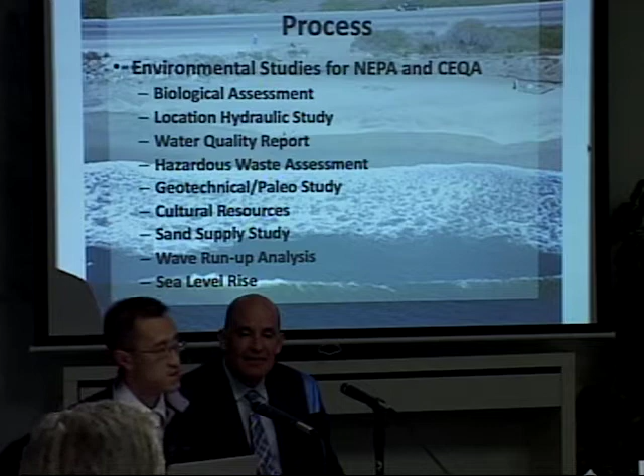With those studies, of course, permitting is also going to have to be considered. The agencies right now that may be at play include the U.S. Army Corps of Engineers 404 permit, U.S. Fish and Wildlife Service, National Marine Fisheries Service, the Regional Water Quality Control Board with the 401 certification. The California Coastal Commission will be overseeing the plans, as will the California Department of Transportation.

We have looked at several alternatives, and we believe we're going to show you the two that will have the best chance of not only protecting the beach, but again, allowing the access, that are, as James mentioned, quote unquote nimble enough so that it will work as an interim solution.

So this is the first conceptual alternative. Maybe a little hard to see. Yeah, so I think it's worth mentioning, because we all had trouble figuring it out too.

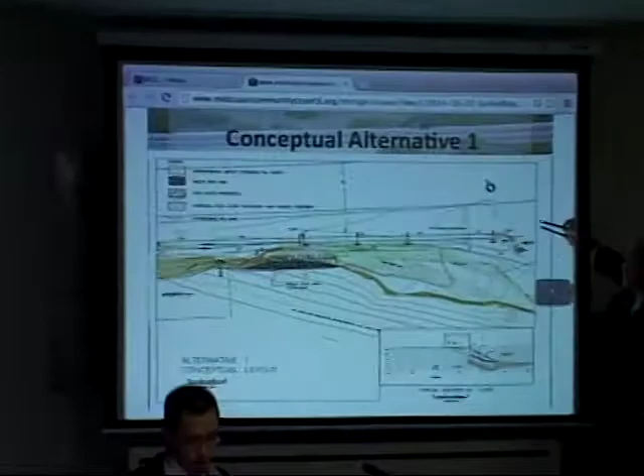If you remember the picture on the previous slides, this is essentially the same view. Can we flip back and forth? Show us where the highway is and where the beach is, to orient us. Coronado Street's here, Highway 1's here, Half Moon Bay's that way, San Francisco's that way, the ocean's here. This is the 13-foot high bluff that comes along. Here's where the severe erosion is occurring.

Currently, the coastal trail stops here, just past Coronado, and then the bike path next to the existing riprap ends right here. So this is the 400 feet of doom - danger - that Alvin can... Okay, so now go back to the previous slide again, so people see it on the picture - basically the same exact view.

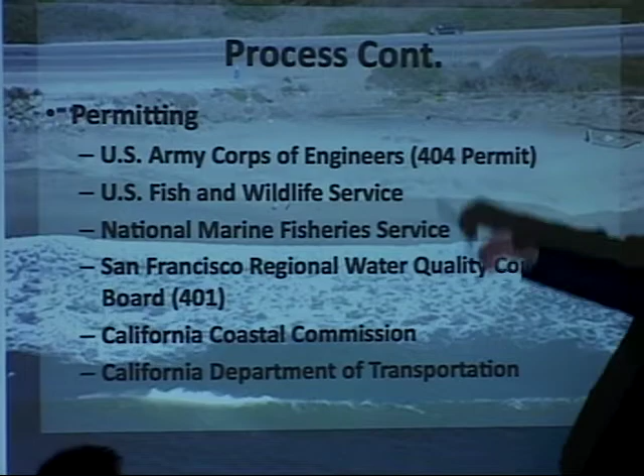Okay, so starting from the northern end,

Like Grant was saying, this is currently the existing coastal trail. We plan on removing a small portion of it in order to conform with our new proposed coastal trail that will run along this danger zone and connect back to the existing coastal trail on the other end. This is about a 400-foot coastal trail, and because it's within Caltrans right-of-way, it will be designed per Caltrans standards. Currently, we have estimated about 20 feet of width.

What's the width of the current trail that's right there where the cursor is? Right now on the northern end, it's a 10-foot trail. The proposed coastal trail will also be 10 feet, but there is also a buffer between the trail and the highway: a 5-foot shoulder on the highway side, and another 5-foot shoulder on the ocean side. So the trail itself is the same as what's currently there?

Okay, yes. I believe on the southern end, the trail is slightly not as wide as the one on the northern end, but... The southern end's wider with the split lane, yeah. Oh right, fancier, sorry. I meant trail, the other way around. Yeah.

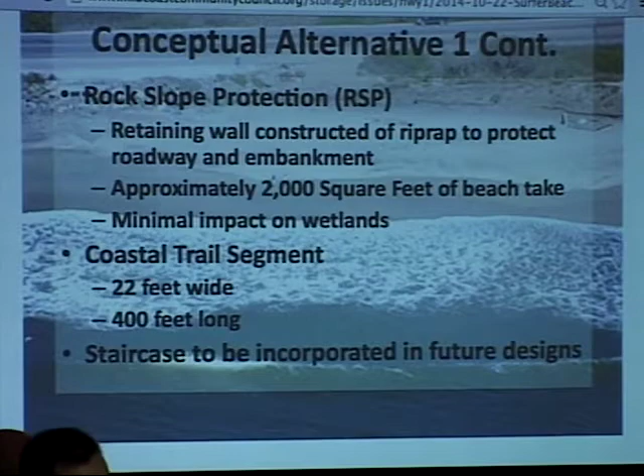With that being said, next I'll talk about the second alternative. The view is the same as before in terms of orientation, this being Highway 1, Half Moon Bay being to the south, southeast, and San Francisco to the northwest.

Again, we're proposing to connect the two ends of the existing coastal trail. On the northern end, again, we'll be providing additional armoring to conform with our proposed embankment. In this alternative, to hold back the embankment of the coastal trail, we're looking at proposing a sheet pile wall that will be vibrated into the beach.

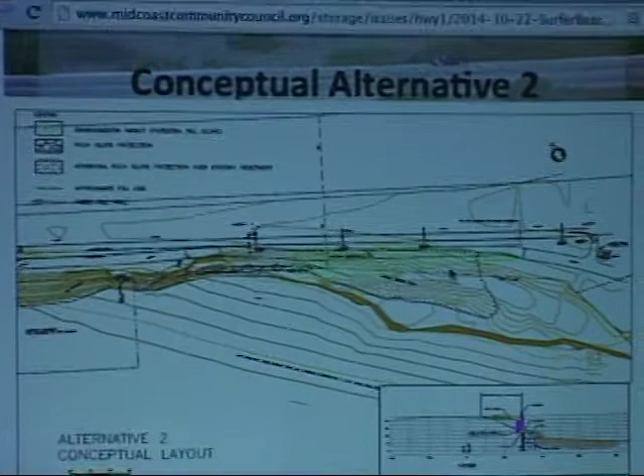As we get closer to the bluffs, it will conform to traditional roadway fill. This green area's edge is pretty much the toe of the fill. Currently in this area there is existing vegetation - I believe it's willows, invasive ice plant, and non-native ivy. There's also a patch of strawberry, the wild strawberry, which is endangered.

Some of this will be removed. The green area will have to be cleared of vegetation in order to put in the fill. But in doing so, what we actually get is clearer sight distance across the coastal trail, and hopefully a better view from Highway 1.

Right now it's a willow thicket, and it's apparent that homeless people have been encamped there. So this would make it a safer trail - people would probably feel safer having an open sight distance. But we would be removing a portion of that willow thicket.

Again, the staircase options are versatile with this one. If we were to come down the middle of the sheet pile, it will probably be a bigger staircase, which may require banisters. And again, temporary access will be provided during construction.

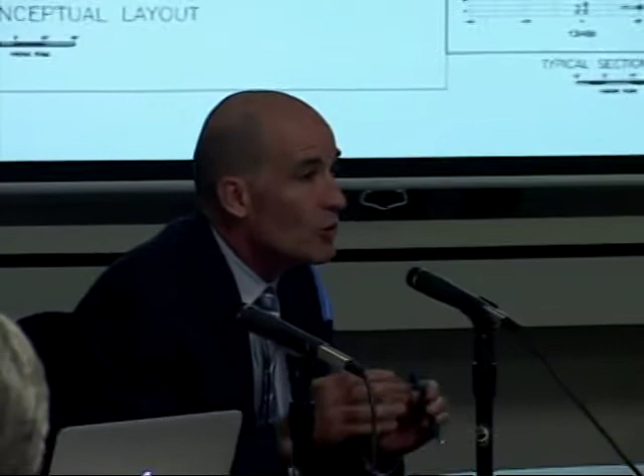Yeah, that's a good question. We have integral consultants doing the sand supply study, and they have access to the Army Corps' model for the dredging study they're doing for Pillar Point Harbor. Plus, they've generated a model for the sediment movement along the coast. So Integral is looking at the sand supply study, incorporating what the Army Corps has already done, and then adding on to that for this study to see how we would additionally affect what they've already looked at. Meaning that when we put the rock or the RSP wall in, the sediment on the coast moves back and forth - typically it's moving down coast, the long shore drift - and then they have this breakwater that's cut it off.

And so without the sand supply, we've caused this excessive erosion without refeeding it. So the Army Corps is looking at either using some of the dredge material from the Pillar Point Harbor to replenish the beach sand, and they haven't quite finished that study, but we've reviewed that and we've looked at that. So we have the Army Corps study.

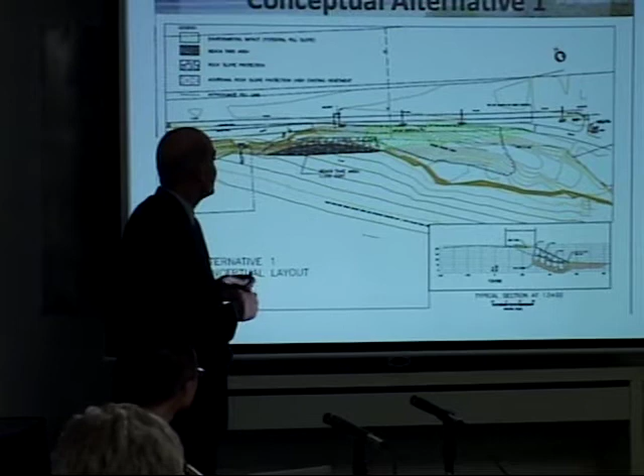We also have some previous cultural resource study that's shown this area doesn't have any existing cultural resources. This site, if you actually go to the beach, you'll see there's a tire in the fill and chunks of asphalt. It's an old Caltrans or old highway department embankment, sitting on top of several layers of terrace deposits - slightly cemented sand deposits that are natural.

So it's not of that great concern that we're not allowing the sediment to continue to feed the beach, because it's not clean sediment. We have looked at those studies and reviewed them, but as far as this project, this has very small impact compared to the entire Pillar Point dredging and the sand supply on the beach.

One of the things I was wondering is, obviously the erosion south of Surfers Beach is very bad. Is there one option that has less impact, or do we know what that impact would be?

The reason we have this problem here is because they stopped the RSP here, and you got this erosion here, and then on the southern end they stopped the riprap by the housing development. You've seen how the coast has moved. We're losing about 1 to 2 feet a year, some people think it's progressing faster, up to 3 feet a year now.

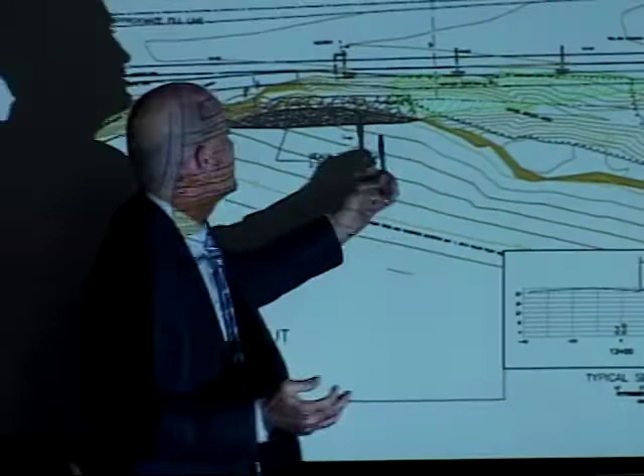So some of the things the Coastal Commission asked us to look at was what could we do at the end, some kind of treatment that would slow down this erosion. The sad truth is, wherever you stop your armament, you're pretty much stopping your protection.

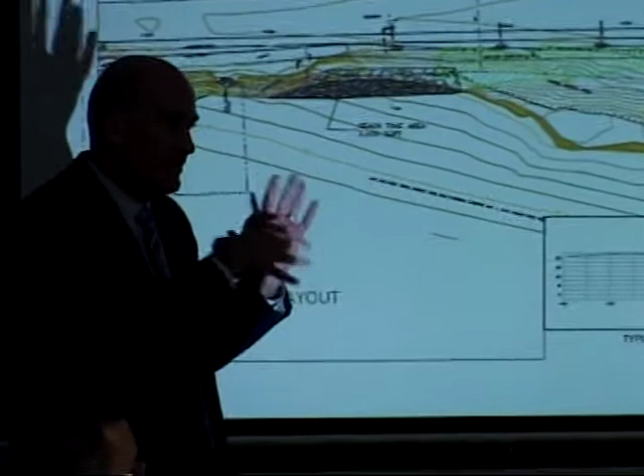But in Oregon they've done what they call a dynamic revetment, smaller rocks, which reduces some of the impact. My personal opinion is RSP has the quality, because it has a lot of reflective faces, that the wave energy is more absorbed than just a wall. Walls would just reflect the energy directly, so you get more energy reflected on the adjacent point, where riprap may absorb some of that wave energy. That's one reason on the bottom of the sheet pile wall we'd have RSP, to maybe absorb some of that and also prevent a scour hole from developing below the sheet pile.

From what we've seen, the Coastal Commission seems to like the less beach-take approach, and the wall would give you less beach take, but it may not dissipate as much wave energy. But both of those are kind of minuscule comments, because no matter what we do here, this is going to continue to erode rapidly.

And when you talk about it being nimble and interim - two questions. What do you think is the realistic length of time that this will be completed, and what is interim?

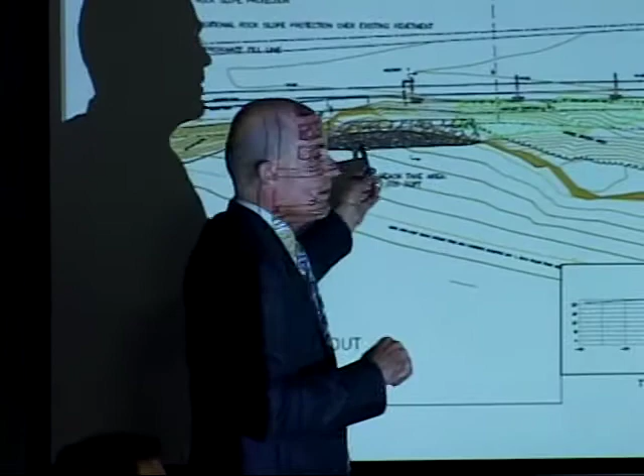The project itself could be completed probably - I would guess 8 weeks of good construction, you could construct this. From now, we'd be looking at the design being complete in April and probably construction beginning in the summer.

That's more in the county - I think we're looking at construction beginning in July. There is an aggressive schedule on this project, and one reason is there's a very specific timing for Caltrans funding to apply to this project. They will not be able to allocate the funds needed to construct this if it's not permitted and designed by April, so it goes to the California Transportation Commission in June. They have an extensive lead time to achieve that. So as soon as we're hoping for approval in June, we'd be looking at construction in July, August at the latest.

Is it possible for us to get a realistic rendering, a Photoshop or whatever? It's very difficult to have a sense of how this is going to look.

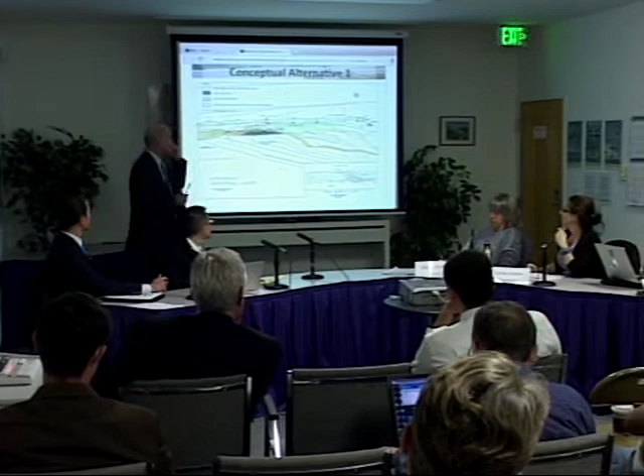I apologize for that. We have some nice Photoshopped renderings of the RSP with the staircase, and we could probably provide those. We all know what riprap looks like, but what does a sheet pile look like from the beach?

There's probably two types that would be applicable here, either a steel sheet pile facing or concrete. Sheet pile, if you look at it, is a wall that's not straight but kind of half a hexagon that connects to the adjacent piece - little half hexagons of steel. It'd be about 6 feet high, and as the erosion approaches the wall, it'd be about 10 feet high. So you'd have this 10-foot high, rusty-looking steel. It forms a patina of rust, but that's actually a protective coating that prevents it from rusting more rapidly. So it'd look like a rusty steel wall with RSP.

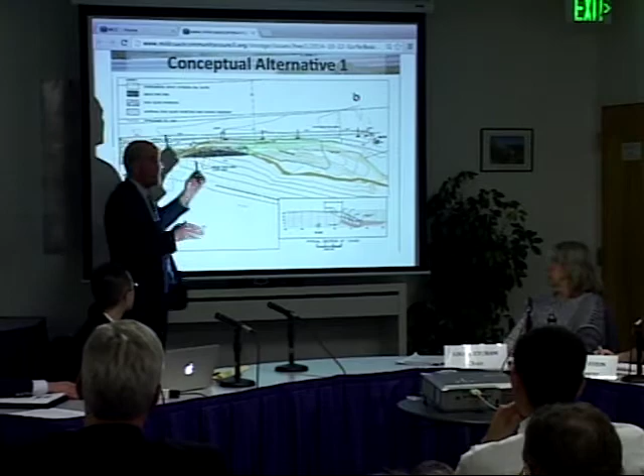We would have a staircase that would go either over the top in the middle or coming around from the side and down, so you could make a much nicer type of stairs access to the beach.

And we'd like to do something more imaginative than just concrete stairs, maybe incorporate rock so it looks more natural or just nicer. Can we do something more imaginative with the wall? Well, that's where you start thinking of a shotcrete sculpted wall. Yeah, we are.

But that's a problem, because if it's a fill, in order to do that, typically that kind of wall is what you call top-down construction. So like we did all over Devil's Slide, where you're building from the top down, excavating, putting in a nail, shotcreting, and then putting a secondary shotcrete coat.

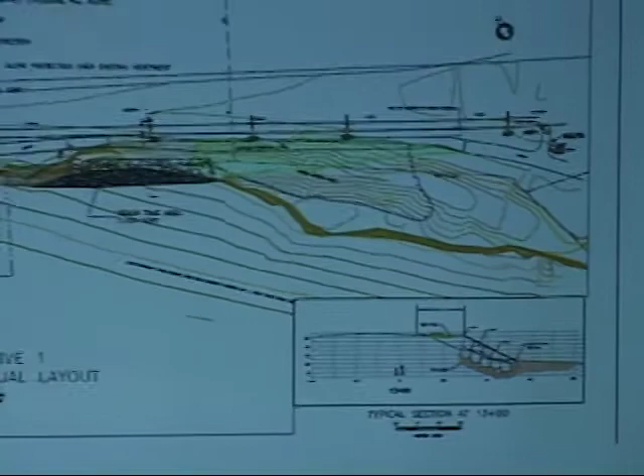So it's being supported as you go down. But here, there's nothing here, so you can't build this until you have some support. To do that here, you would need a sheet pile wall, build it, then come back and put the facing, and remove the sheet piles. It's not the right approach here—it's more for protecting an existing bluff. But if you have nothing there and you're going to backfill behind it, you'd have to use something like these MSE walls you see on the freeway, with precast panels. But the precast panels don't quite have the same proven wave resistance—they've never really been used in a coastal environment.

When you described the construction at Devil's Slide, that's a much taller wall. This is only 6 or 10 feet tall. Does it no longer become an issue? No, it's the same thing, but there's nothing there to build it on. There's no soil to nail it to. Exactly—so that's the type of wall you can build if you have an existing bluff you want to protect. But if you're going to build up an embankment, it's not that type of construction.

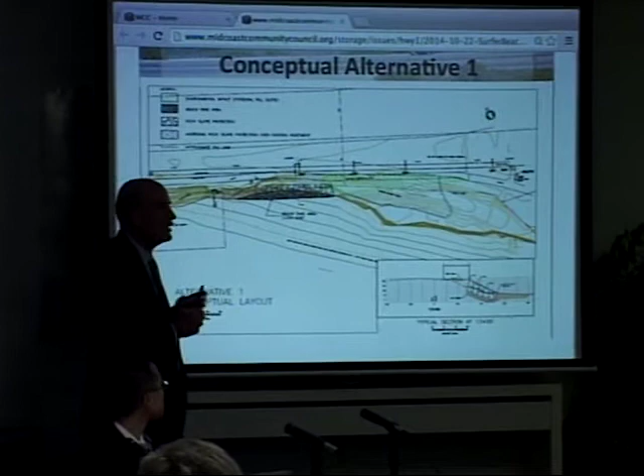You could do a facing, put a dead man on the back, tie it back, and then shotcrete over the facing, but then the costs go way up.

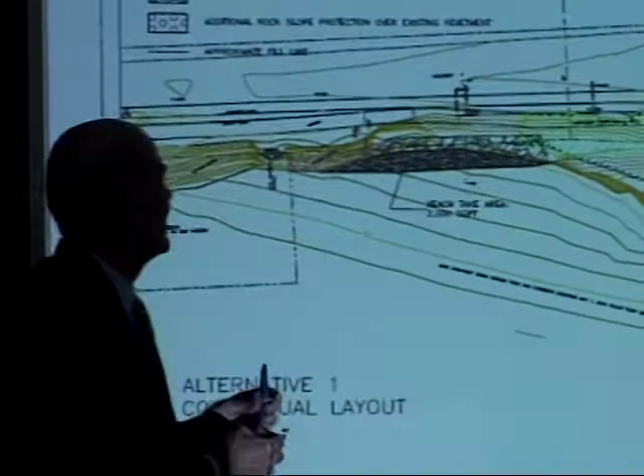And the problem also is that everybody's considering this a temporary measure. I mean, you already have an existing RSP of 700 feet. So it doesn't seem to fit the purpose to make this one little piece, to beautify this one little piece. But you already mentioned that it's just going to keep on going—the whole Moss Beach area is going to.

This is going to continue to erode, and the Coastal Commission would like to see Highway 1 moved. Their plan—and I don't want to speak for the Coastal Commission—is that this would be temporary, that they would eventually remove this. Highway 1 would be moved closer up here, and all this coast would naturally erode away.

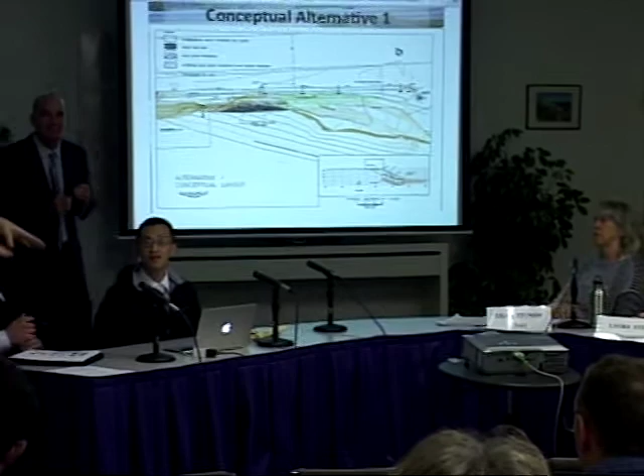This is an interim measure. How long is the interim? Right, and will the interim—oh, maybe I'm mistaken. No, you're right on track, but let me jump in, since I've been part of the conversations with the Coastal Commission. As everyone says, this is an interim project. Wow, a lot more people showed up since I was up here.

So this is an interim measure, and what we're looking to do is construct a project that will allow us to protect Highway 1 while enhancing coastal access and recreation, for a duration that allows all the necessary stakeholders to identify the appropriate long-term solution. After this is built, we anticipate having to monitor the effects of it, and how that plays into the long-term solution. So we can't give a statement that this project will have a lifespan of X, because there are factors we don't know, including what will happen with the Army Corps of Engineers project.

All of those are factors that will play into the life of this project. However, we are committed to this being only an interim solution, because we identify the need—Supervisor Horsley understands the need for a long-term solution. If you leave this wall there and don't conduct a long-term solution, you eventually lose the beach, and that's the last thing we want.

We can't give you a number of years as far as what the lifespan of this project is, because we're going to have to monitor all the effects and different elements that will be in play here - how the sand is moving, the sand supply, sea level rise, the Army Corps of Engineers project, all of that.

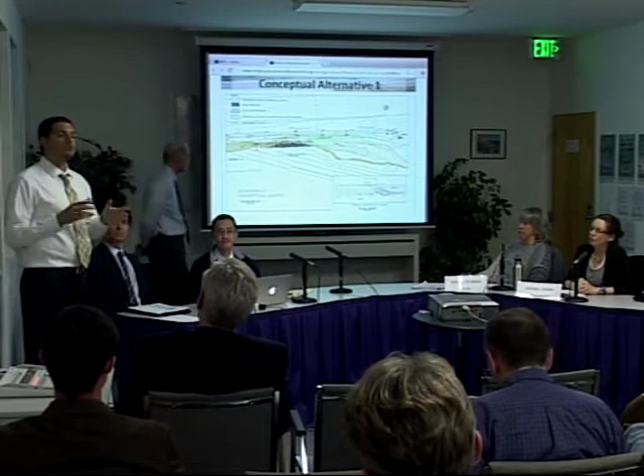Nicholas, do you know why the money for Caltrans dissolves after June 2015 for the project? So in order to fund this, going way back - when we first started this process, we worked with Caltrans, and Caltrans identified the State Highway Operation and Protection Program, SHOPP, as the funding source for their construction. In order to do that, they had to amend the fiscal year 14-15 SHOPP budget to accommodate this project, so they got the amendment in during that budget.

Now, in order to access that money, we have to take the permits and the designs to the California Transportation Commission by their last meeting in June, which is the end of fiscal year 14-15, so they can officially sign off on the funds. They can't give us the funds until we have the permits, and that's why there's this tight timeline attached to the funding.

So you said that there's been many alternatives looked at. You're presenting two. Can you tell us the other alternatives that you've looked at and which alternatives you have not looked at?

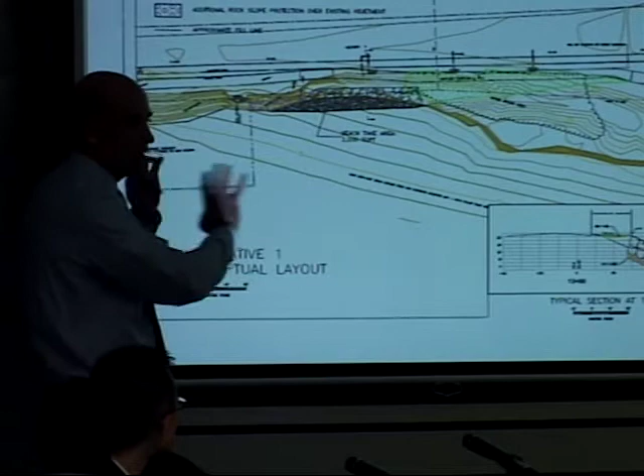The alternatives - we looked at riprap, but like I say, that's a top-down approach. First I'd like to say Nicholas had a great point: remember, this project is an interim, almost pseudo-emergency project to protect Highway 1 access to the coast, because we're quickly losing this section of roadway. Other projects will have to look at the full length of the coast. But the other alternatives we considered include the MSE type wall, which is a concrete facing that has tiebacks, but hasn't been proven to be ocean worthy, and two types of sheet piles.

Others have what they call a mass wall system - it's just a gravity wall, basically a type 1 wall like Caltrans uses, a typical concrete wall, but in that case you'd have a massive footprint and foundation. One of the guidelines we were given was from the Coastal Commission, that they want it easily removed. If you put in a system with a large footing, a large concrete base, when you remove it you create quite a scar, quite an imprint. It's difficult to remove, it's quite destructive, whereas with the rock or the sheet pile, you can easily pick them up one at a time just as they were placed, or with the sheet pile you can pull it out, and there's not much of a scar left.

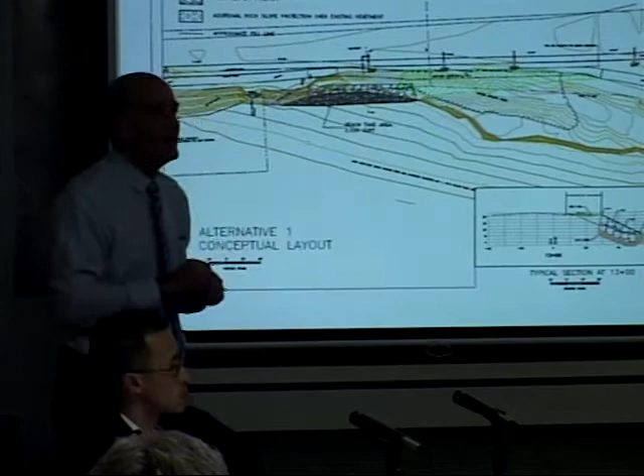So some of the few alternatives left - there's also what they call these jack systems, which are these big giant concrete pieces that look like jacks, like the child's game with the ball and the little jacks. They interlock, so you have this interlocking concrete monstrosity, but then it's difficult to come up with stairs that would come down through that, and it's a whole different look to the beach.

Has there been any look at engineered fill with sand replenishment? That's part of what the Corps is looking at, and that's one of the things we don't know. The Corps is looking at the sand supply on the beach, and that's well beyond our scope of work, which is just repairing this one small section. The beach itself is something the Army Corps has been studying for years, looking at dredging and taking sand from Pillar Point Harbor and placing it on the beach to resupply it. That's a good alternative, but it's not a short-term project.

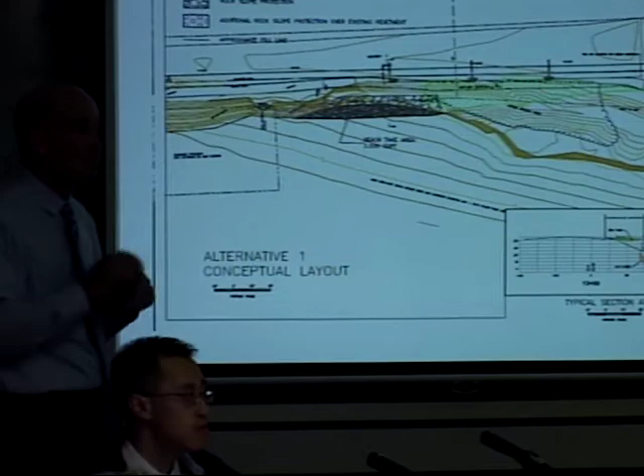So we're not looking at the beach replenishment aspect of it, because it would take too much time. That's a huge study. The Army Corps is spending a lot of time studying that right now, so this is an interim solution. I believe they said it was 2 to 3 years out before they have any decision on that at the earliest. I'm just thinking about comparative costs, to build the riprap wall versus to fill it in with engineered fill, forgetting about the dredging but just bringing in sand.

Right, well the engineered fill - anything building that embankment is going to be engineered, compacted 8-inch lifts, built up the same way as the sheet pile, it's got engineered fill. But you have to have some sort of protective armament on the coast side, because the wave erosion is so intense that you have to have something to armor that. So you couldn't just keep piling sand out there - you'd be putting a lot of sand at that one location continually. But again, that's what the Army Corps is looking at for that whole stretch of beach replenishment.

One of the reasons Supervisor Horsley started this project is because it was clear that the Army Corps of Engineers wasn't going to be ready in time to conduct a project that would provide some type of protection at this location. So to try and do what they're doing would take too long.

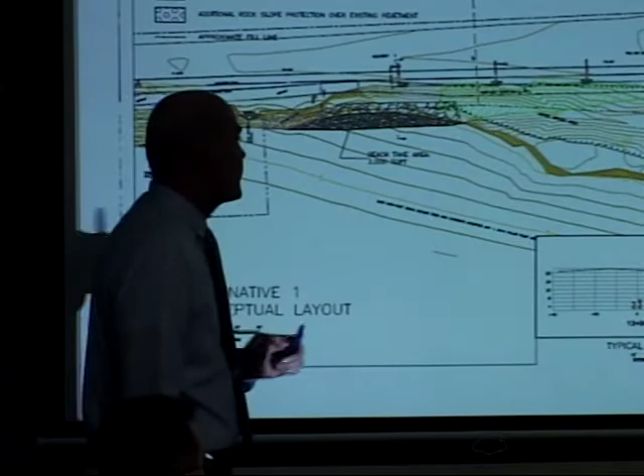Yes, and if we want to save more space we could put a vertical wall, but I'm always kind of resistant to putting a vertical wall next to a trail. Not just because you have a falling hazard, then you have to end up building a barrier next to it. It becomes a maintenance issue, and it becomes much more expensive if you have to have a barrier next to a trail with a vertical drop-off of over 6 feet.

Okay, and I want to come back to a question on the sheet pile wall. You mentioned both concrete and steel. I quickly looked at a couple examples of both. The concrete one seems to have the same kind of problem you were talking about with a true permanent concrete solution - it's a lot harder to remove. And I'm not 100% sure, because concrete doesn't have as much tensile strength, it's more brittle, so I'm not quite sure if I can put in a 10-foot high one. Plus, with the material, I haven't done my boring to see if they could drive the concrete pile. So I know that the steel pile would work.

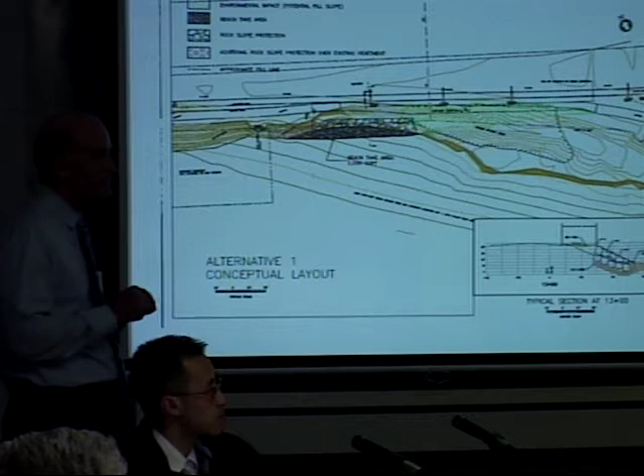And even on the steel, there are many different styles. And obviously, one of the concerns everybody has at this point, aside from armoring causing problems further down the line, is the appearance, because it is a heavily used beach. Some of the steel designs are quite ugly, some are almost tolerable. So I guess one of the questions I would ask is, how much of a trade-off are you making between visual effects and obviously strength and durability?

I'm more of a believer in - I actually don't mind the look of the rock, and I know the rock works. I've used it down at Pescadero and in different locations.

In the staircase, remember, it's gonna be about 10 feet wide, so it's gonna command the center of attention. The nice thing about the staircase with the RSP is that the RSP is gonna be at a 2-to-1 slope, your staircase is gonna kind of match it, and you could do something imaginative so it looks like it's made of rock or something - it would be more interesting. I saw some nice staircases on the coast at Sea Ranch where they filled it with permeable gravel, made a nice looking staircase. So I think the staircase is gonna be a nice solid staircase with easy access.

We witnessed a couple of older women struggling to get down to the beach today, and one woman talked to me about the number of people she's seen fall and slip. I think if you can just provide nice access to the beach - remember this is a temporary measure - the things we've been tasked with are preserving Highway 1, connecting this trail, and then providing nice, safe access to the beach, since there's no access for the 700 feet north or the almost 2,000 feet to the south.

One more question, then I'll let somebody else get in. The classic problem with stairways coming down along revetments is you get wave action, a nasty storm, and all of a sudden your stairway ends 2 to 4 feet above the beach, and it's even worse than it was before. Do you think you'll be able to deal with that problem for the length of time that this is proposed, the 5-6 years? I think so, but that's a very interesting point.

When I was out yesterday, the storm surge was splashing up against here when mean high tide is supposed to be up in here. So definitely, as we get sea level rise and more larger storms, you're going to see a lot of that type of erosive action. So the key would be how are you going to treat your bottom. I would probably take the stairs below the sand and bury portions of it so that if it did get exposed, it would still be there.

But we have many agencies that we have to satisfy, so we have to really try to balance how much beach we take and where our footprint ends. If we extend it too far, then we trigger more permits that make it more difficult to get approved, so it's a real balancing act. But I understand your dilemma, and I think it can be solved with keying it in a little deeper.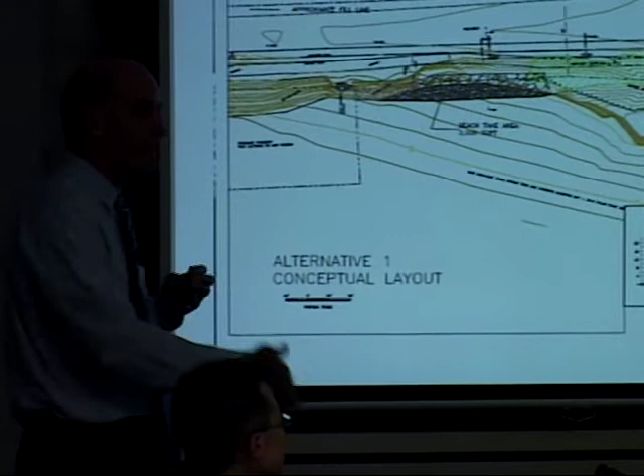Are you aware of the staircase that was built in Pacifica at Land's End, built into the beach? No, I'm not familiar with it at all. Okay, could we stick with this? No, we're talking about the staircase. Well, all right.

Okay, well, I have pictures of it in construction. Please send it to me. We were trying to get all ideas for stairs, and I think the staircase would inform whether this project looks interesting and is satisfying to the public or not.

I think I would invite you to go over there. It's on Esplanade in Pacifica, right where the apartments were condemned, just past that, Land's End. There's a switchback and there's this large concrete staircase at the base. It's good to be familiar with it.

Quickly, could you compare and contrast alternative 1 and 2, pros and cons, just briefly, in your own personal opinion as to which is a better option? Okay, the pros and cons.

Well, you have your aesthetics. One, you have the riprap, which will match the existing RSP, so it'll blend in to the rest of the beach, whereas with the sheet pile, you'll have that vertical face. Whenever you have a vertical face, you have a bluff, but there's always the worry that kids or dogs or someone could fall — there's the fall hazard.

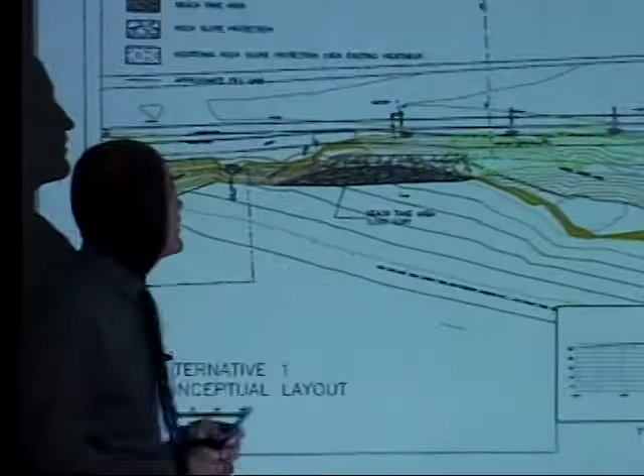That's what makes that a winner in our opinion. This dark gray area is what we're calling the beach take, the actual lower portion. With the RSP, you would have more beach take. If you slide the other option over, you'll see you don't have to — here you wouldn't have something as massive. It would be a little more subtle.

All right, any more questions from council members? I just have a couple small questions. Thank you guys for working on this, I really appreciate it. I know from the meeting that we had on site that it's a good team, and you guys are very enthusiastic about it, so that's definitely good to know.

Just a couple minor questions. The vegetation that's going to be removed up in the green area — will no vegetation be replaced, or will it just be the 22 feet of roadway or trailway? It would be mitigated; we would of course use erosion control plants on that 2-to-1 face, so we'd be putting back natives.

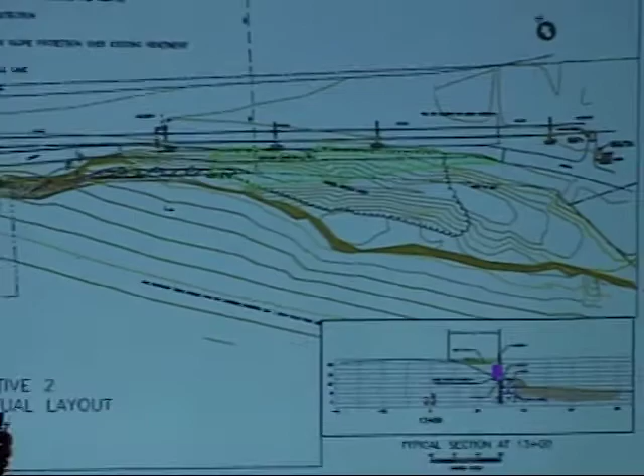There's a large area of South African ice plant that would probably be removed and planted with natives. So there would have to be some type of mitigation for the plant removal of the coastal shrub, and we'd probably be looking at this area slightly smaller, but replacing that ice plant with a native plant. There's a nice patch of coastal strawberry — our biologist was excited by it, a native wild strawberry — that I believe may be a species of interest, so we'd be looking at planting natives as mitigation.

Okay, great. In that same area, you had mentioned what you thought was evidence of homeless people — that there's not homeless people living there, but that's where people go to the bathroom when they visit the beach, since there's no restroom. You have the willows down there.

I've never made my way up through those dense willows there, but I do know there's a little arroyo right there, a draw — you can see it. My question is, is that draw from just wave action pushing up, or is there some kind of pipe or drainage coming down that's going to undermine whatever fill you put in there?

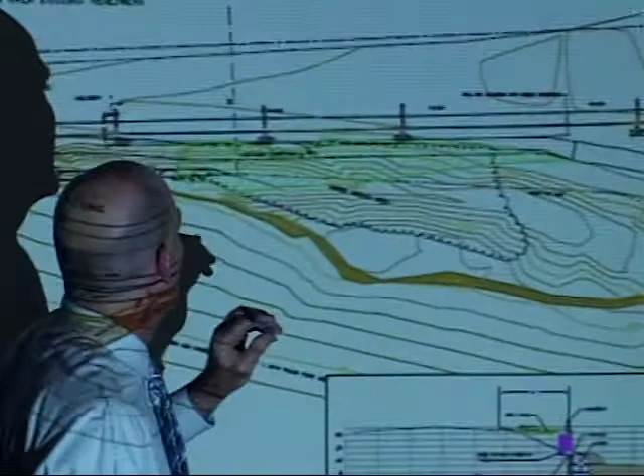Well, it's very slow, but there's actually a pipe that comes out here, and there's an outlet that comes here, and this water makes its way back, and just sheet flow from this area kind of goes down that area. I'm not sure why that bowl formed. I suspect that when they built the highway, there was an embankment for the highway, and then there was this cliff here, and just over time, erosion coming down from here and back here has created this soft bowl.

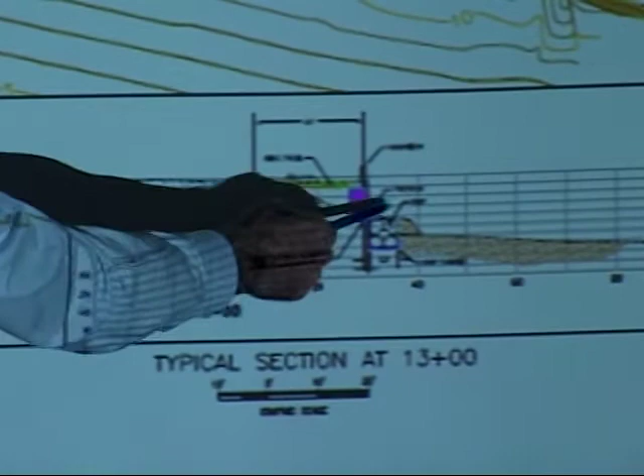But the thing about the wall, you would have this drainage layer behind it, so you would be collecting that groundwater and taking it out through the face, through the series of weep holes. So you shouldn't have that problem. There's no evidence of erosion now, so it doesn't get a large amount of flow, so I wouldn't be that concerned.

Okay, thank you. But something would have to be done at this toe to take care of that water that does come into that. Okay, let's see.

So without a visual picture of this besides these engineering diagrams, as a person that's not into construction, rock slope protection retaining wall - when I look at the cross-section diagram, it looks like there's some kind of face on top of the riprap, on top of the rocks.

That was kind of a misprint. We shouldn't have said wall. That's just RSP.

No, that's not - that's just a theoretical 2-to-1 slope. So the RSP, let's just make sure. I've seen areas where we have vegetated the RSP, but because it's under wave action, you couldn't put any soil or vegetation on the riprap. So the RSP is going to look like further north, with just big boulders there. Exactly. All right.

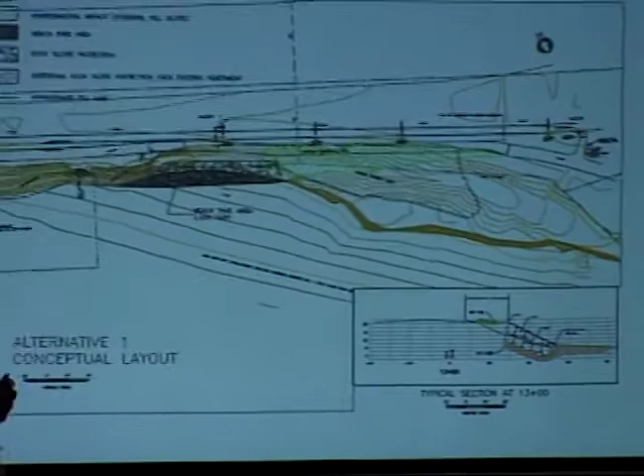And Alvin, you mentioned, pardon me if you've already addressed this, in this process slide, that there's permitting and several agencies listed there. Maybe it was just the words, but you said some of these may be at play. Do we know exactly which ones will be at play? We're eliminating them as we go. Like the Army Corps is triggered if you do any excavation below the mean high watermark, so we're trying to avoid that, and so we don't think that's in play.

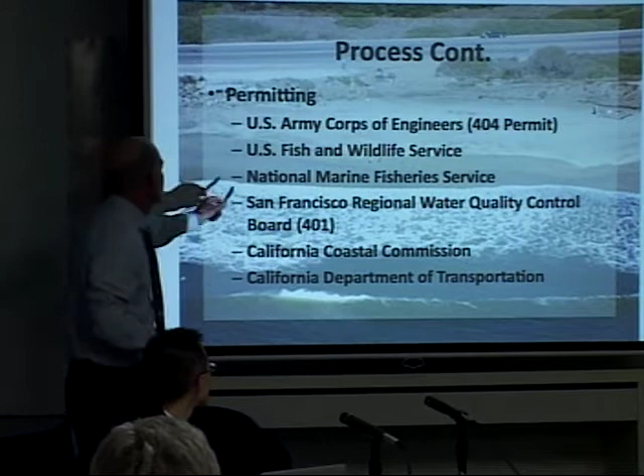We visited with National Marine Fisheries yesterday, and they don't see any concerns with the sea mammals, but we didn't talk to Fish and Wildlife for the land mammals - they were unavailable. The Marine Sanctuary shouldn't be an issue if we're not going to be on the beach with equipment or get below the water tide, we shouldn't generate any concerns from the Marine Sanctuary. And then the San Francisco Regional Water Quality Control Board - if we don't have water running off our project into a stream, then that shouldn't be triggered either. Okay, so we're not quite sure yet.

But this week, will we have this understood before the funding window for the council? Yes, we've now almost completed all of our studies, and then our environmental company, ICF, will be preparing an environmental assessment, which Caltrans and the Coastal Commission will review, and will apply for what permits are deemed necessary at that time. Okay, and last question for you, Grant.

With either of the alternatives, what is going to be the impact to traffic flow on Highway 1 there? And does one of the alternatives have less impact on traffic flow than the other? Okay, go back, that's a good point, I didn't even talk about it - can you go back to the slide? Either one of these is fine. Basically, the idea would be we want to minimize any impact to Highway 1. This was the first evening I've seen rush hour traffic, I guess, in Half Moon Bay. I was caught in it, so I understand your concerns.

So with the RSP, what we've done in the past, you have to have a crane sit and unload the rocks, and so you have a truck back up, and they usually unload it off the truck and place it. It's called Method A construction - each individual rock is placed on the beach. So the idea would be that the crane would sit off the road.

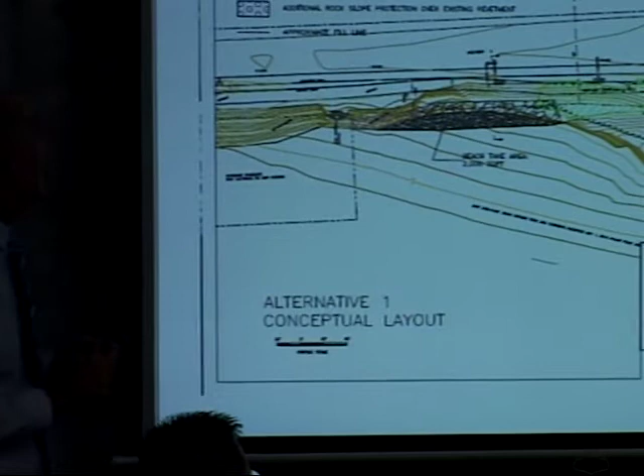There is enough shoulder in this area that I think the approach would be to build a slight detour, trying to shift Highway 1 over so that you can still have 2 lanes of traffic. And when you're bringing trucks in, you would have a flagman that would have to direct traffic to allow him to get in there. But the idea was, I think we can build both of these while keeping both lanes open, with maybe some temporary closures.

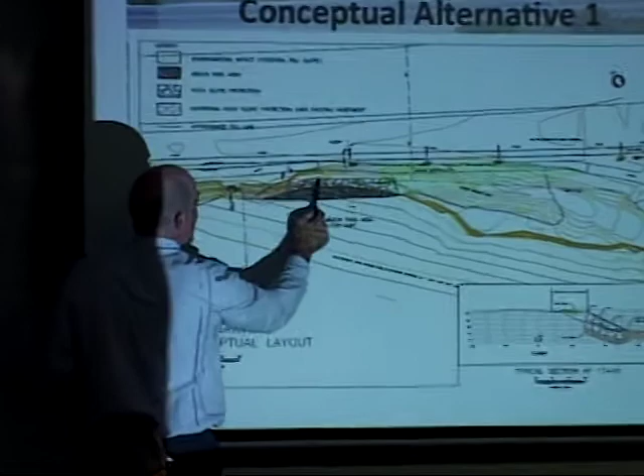Building the path itself, I think if we have a slight detour in place, I don't know the impact on the left-hand turn at Coronado with the detour. We haven't looked into that yet, but even with the sheet pile approach, we would most likely delay us a little bit. The sheet pile driver would sit here, he'd drive his piles, and then we'd build out the embankment, then he'd move out to that section and build the next, so that way we wouldn't have to be on Highway 1 to build it.

So it'd be a slightly slower process, but it would eliminate traffic delays and closures. Well, maybe traffic closures, but with the crane and flagman, there's gonna be delays.

So then the next question, follow-up to that would be, is this gonna be a daytime project? That hasn't been determined yet, and that's what we have to look at, Chris, is how we're gonna construct it, and then try to minimize that. Typically, if we do have closures, they would follow Caltrans guidelines for this location of when they could do the closures, and most likely a lot of the work would probably take place at night, but then you'd have to consider the noise. So that would be up to a lot of you also, whether you'd want some noise at night or daytime in between peak flows, traffic delays.

Thank you, Grant, appreciate it.

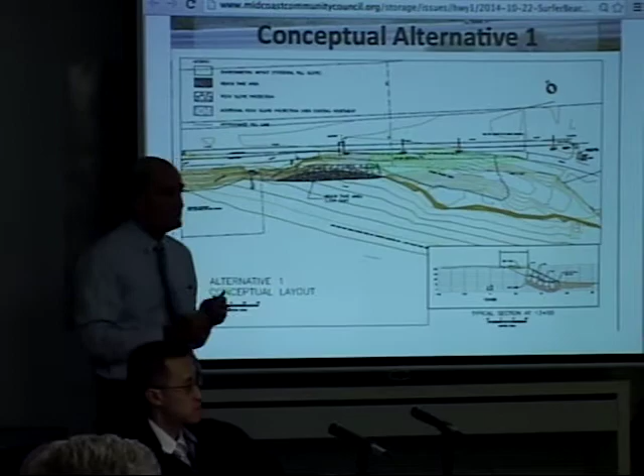Back to the shotcrete alternative, you said it really wasn't doable. If you added engineered fill, then you would have something to anchor the shotcrete wall, is that correct? But this would be cost prohibitive, or it'd be more expensive. By how much? I don't know yet, but it'd be probably just guesstimating, throwing out the cost of the path is all the same.

It would be at least double the cost for just that. I mean, just taking the rock and placing it compared to building, because you'd have to build a wall and a fill behind it, and then you'd have to come back and do the decorative shotcreting and sculpting secondary. So it would be just added cost, and it would take longer.

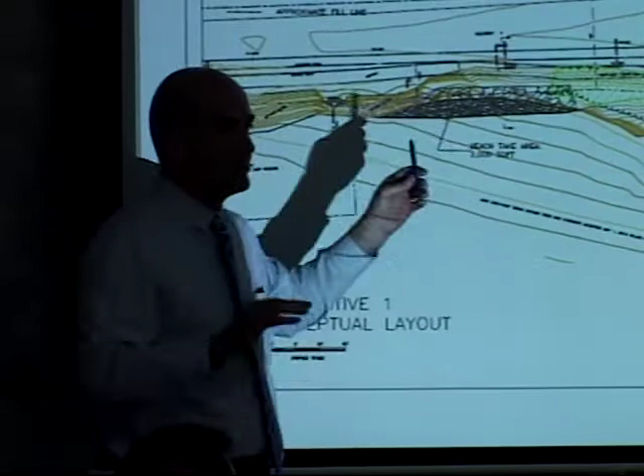And the one thing, spraying concrete on the coast, there's a zero tolerance for leakage and spillage onto the coast, so there would be an enormous amount of effort that the contractor would have to do to prevent any, because shotcrete's a spray, almost liquid, so there's a lot of runoff. So he would have to be able to collect that and prevent any spillage from getting onto the beach without facing major fines. So my thought process is that I don't even want to go there, but it is. I mean, anything's possible with enough money and engineering.

But part of any riprap project is a yearly monitoring program where you physically watch, and the idea is that if you see rocks begin to walk away, you retrieve them, pull them back, and replenish the beach. But that's an excellent point. Right in that corner, the cement path is actually cracking and caving in as well, as it deteriorates. They added the cement, I think in the 2000s, because waves were breaking over the riprap, bringing the fines out through it and leaving voids, and they tried to just fill it with concrete. I know exactly what you're talking about—the concrete they placed was undermined and it's now caved. Thank you.

A couple quick points, if I could make. I think it's a really important time to put some signage along the highway for pedestrian crossing, because there's no way to cross safely other than doing the death march, and we have kids doing that day in and day out. There's no flashing lights, there's no pedestrian crossing signs.

I would also make a point, sad but true, there really isn't a lot of beach left in front of this area. I went down and took photos from end to end at high tide, not even that large a swell. Even in summer, it's mostly just clay underneath, with cracks and fissures where people were twisting their ankles. So that's the sad truth about the sand. The beach that you're protecting there really isn't a beach anymore.

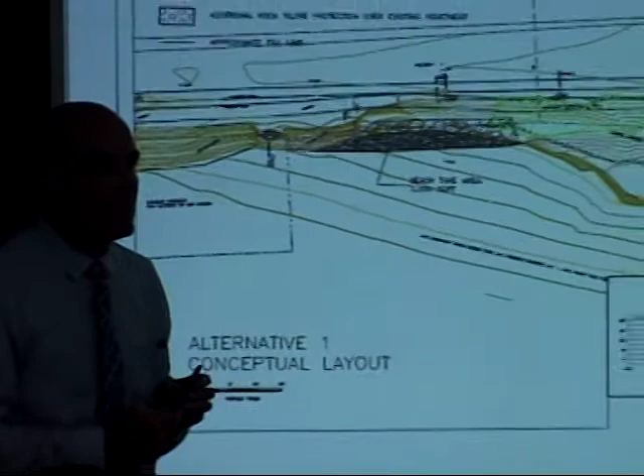In the wintertime there's no sand, it's that exposed terrace deposit, the dark black terrace deposit that forms a little bench, so it would be out onto that. So many times of the year there would be no beach at all? During high tide there's no beach right now, and it would be similar. So you'd be losing about 13 feet.

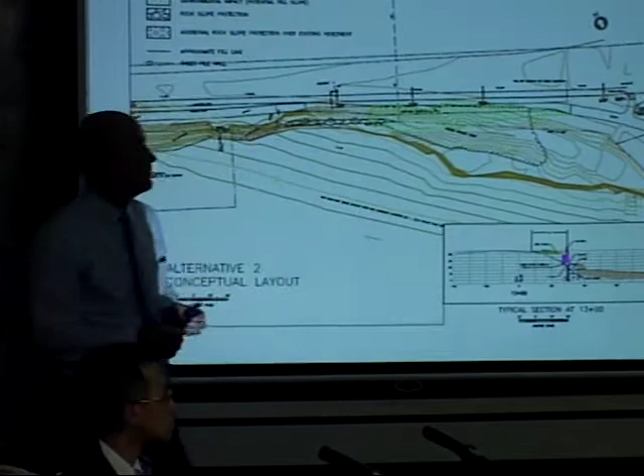So in that time frame, would you lose less beach than you would with the other option? Well, you wouldn't be losing beach, you'd be losing the bluff to the south. And whoever brought up the point that whenever you do any modification to nature, you're going to change the dynamics of nature, and there's going to be a consequence for any action.

You're exactly right. But there's also, if you don't do it, the consequence is that erosion occurs and you lose Highway 1, you lose property. Oh, I understand that, but my question is this:

if you look to the north where the rock is, where we've already lost sand, right? At high tide now - not even at high tide, but at medium tide - there's no beach, it's just water. Let me finish, sorry.

And what's going to happen is, either with rock or with this wall, that loss of beach is just going to progress, even before you get to the bluffs. That sand's going to continue to erode, and with time, even at medium tide, the ocean will reach that wall or rock. So my question is related to that - with time, you will undoubtedly lose the beach.

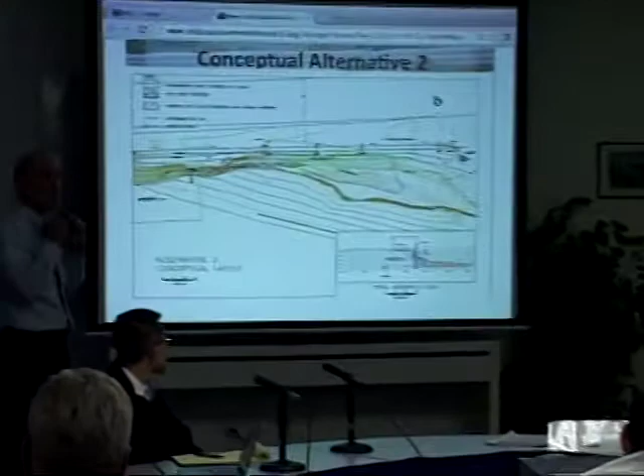The beach loss is not a consequence of the rock. The beach loss is a consequence of the lack of sediment feeding the beach, which used to come from Deer Creek and Denniston Creek and the bluffs north of the pier, which the breakwater has cut off and removed. These rocks, the only sand they're preventing from the beach is the sand that's behind the rocks.

Right, so I think you guys are saying the same thing from different directions. Essentially, when the waves hit the rocks, there's a lot more energy, it carries more sand back out, so the sand on the beach is reduced, and you end up with essentially the water level being deeper.

But if you had replenishment, that wouldn't occur. Right, we're both saying the same thing, it's the replenishment that's the key. No matter what you put here, it's not affecting the beach sand. The beach sand is a consequence of longshore transport, I understand that, but there is no replenishment. Exactly, and because you cannot plan for that to happen.

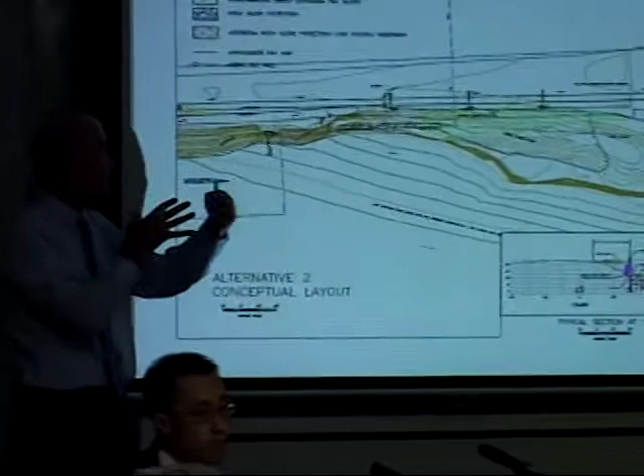Okay, so you did say at the very beginning of your presentation that the rock absorbs wave energy, so you get less loss of sediment, less erosion to the adjacent areas. The waves hit the wall and then they're reflected, and that energy attacks the adjacent portion. So with the riprap, you have a lot of different faces, so the energy is more absorbed in the riprap and it's not translated to the adjacent bluff. So it doesn't cause the sand below it to be eroded more quickly.

Okay, let me make sure I understand. So what you're saying is that regardless of whether it's rock or a wall, the loss of sand in front of it will be the same. Is that what you're saying? Right, the loss of sand here is not a consequence, it's a very minor consequence of the rock here, only because it's not allowing this to erode and feed the beach. The loss of the beach is from not having the sand from Deer Creek and Denniston Creek, which used to come in and be transported down the beach. Okay, thanks.

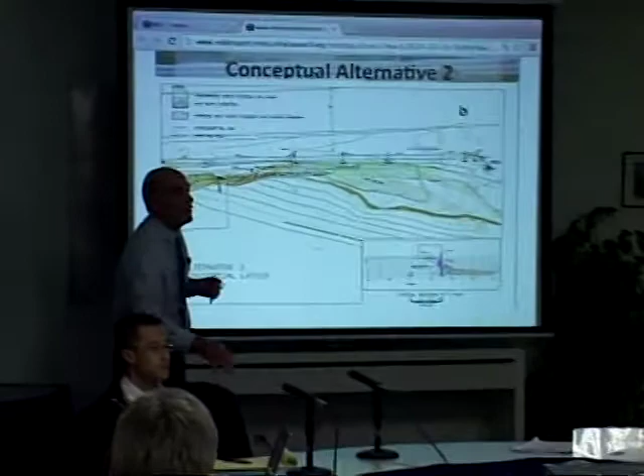When you described the coastal trail, you have this project ending where there's currently about a 5-foot sidewalk that goes above the riprap, right here. And you would not affect the trail going north from there, it would stay in its current conformation? Right, I think we would recommend that this end piece be removed so you can have a better conform. This is sort of in violation of Caltrans, they like to have a wider gap between the roadway and the trail, so I'd recommend just moving this end piece a little bit so you're not just conforming into this smaller space.

So the point I want to emphasize is that what you've done, the 400 feet, was in effect a dangerous area because traffic was going both ways, both bicycle and foot traffic. Now you've improved that area so it's wide, 20 feet, but now you have an endpoint right at that sidewalk where everything has to compress to 4 feet in width. No, it's still a 10-foot trail here. But you've got 10 feet where you have bicycles going both ways and people going both ways. Is it really 10 feet of concrete there? No, it's asphalt, but we measured it here and it's 10 feet. I thought it was 8 feet here, but I know it's definitely 10 feet. It just looks to me like people may hit that at a higher speed and there'll be more congestion there, because now it's sort of diffused.

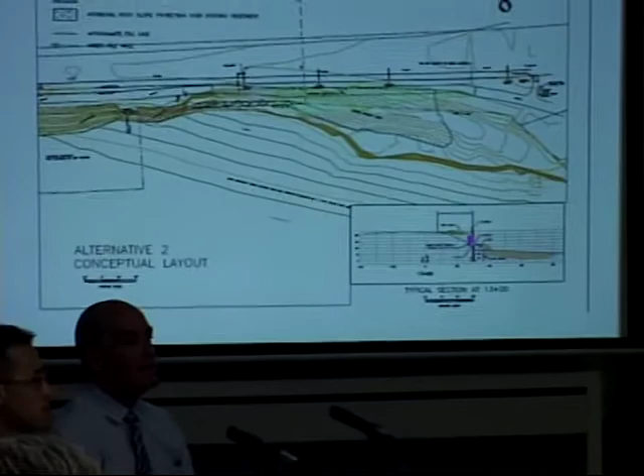Could you tell us what type of engineered fill you're going to use in that green portion where you said it will be sloped? Can you give us the specifics of that engineered fill? That would probably be a standard embankment with topsoil. Base rock? No, not base rock, more like an AS4, which is the Caltrans spec, or probably more the Caltrans embankment spec, which is about equal portions of clay, silt, and sand with some aggregate. Then on the outer face, you'd probably put about 1 foot of topsoil with a jute mesh netting for erosion control, allowing plants to reestablish on that face. Okay, thank you.

I would like to close the public comment, and I want to wrap this up really quick. We're running late. If the council members want to have any consolidated thoughts they want to impart at this point, take 30 seconds, or we can be done. You got anything, Chris? Dave?

Laura? The only thing I want to mention is the trail surface, and I know you're going to say, oh, it's asphalt here, and asphalt here, but if there was any way we could have some say about that, because nobody's crazy about the asphalt.

And Madam Chair, if we could just have a wrap-up of where this goes from here, so we know what happens next with the project. I just wanted to say, the willows really hold the soil, and you might consider just trimming them. They're really salt tolerant. To just rip them out, maybe it'd be better to have all those roots in that ground, just saying.

As I came in here tonight, in my heart, I wanted to look at the faux bluff treatment, but I also understand the urgency of this project. And just from listening to you talk about these two alternatives, it sounds like maybe the riprap, can't believe I'm saying this, is the better of the two, but whatever.

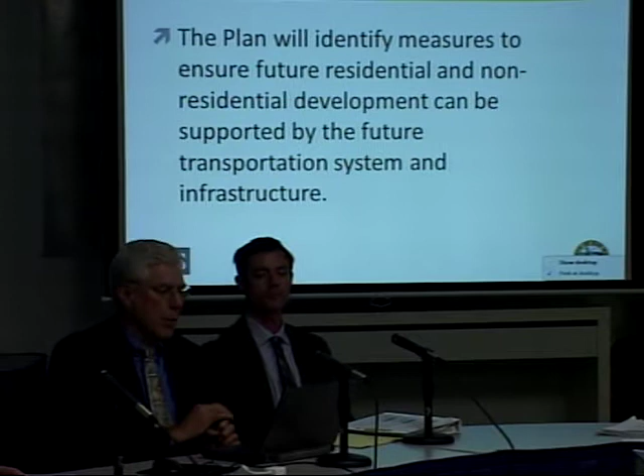So again, the plan is designed to identify measures to ensure that future residential and non-residential development can be supported by the transportation system and infrastructure, and that there be a process for evaluating that to make sure they are in balance, or to reduce development potential if there isn't funding for transportation projects that can maintain standards. This project is not the first transportation project to be done in this area.

There's been a lot of great work, and we are committed to coordinating with other studies that were done. One important one was the Highway 1 Safety and Mobility Improvement Studies, done in 2 different phases, which generated a lot of good recommendations for options to improve the situation. A number of those are being carried forward in the Highway 1 Congestion Management Project that the county is leading. The city of Half Moon Bay is going through a general plan update, and DKS helped them update the circulation elements. We've been involved for about a 4-year period on transportation.

And the Issues Plan Princeton is being led by Dyett and Bhatia, which is certainly taking transportation into consideration. There's an ongoing San Mateo County congestion management plan and program development, and there's also a recreational parking assessment being done by the National Park Service. So we'll be working with all of those efforts and trying to integrate them.

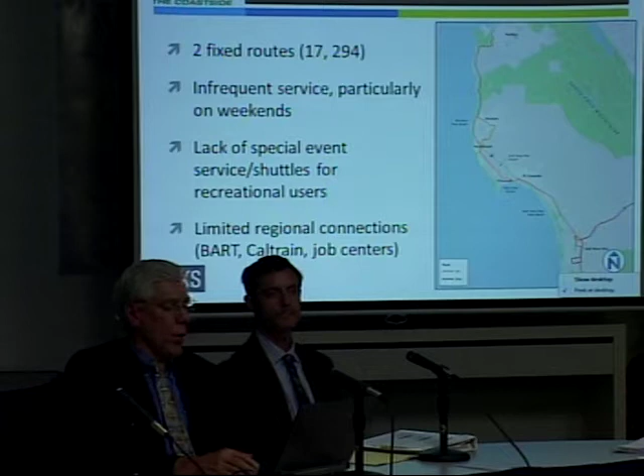In the pedestrian conditions within neighborhoods, there are pretty good pedestrian networks developed, but there's a lack of continuity between communities and developments that needs to be addressed. Many of the sidewalks don't meet ADA standards, but probably the most important thing that's already been raised tonight is improved crossing of Highway 1 is very critical. It's a major connector in the region, but it's also a pretty significant barrier to east-west pedestrian movement, so we are certainly focusing on that.

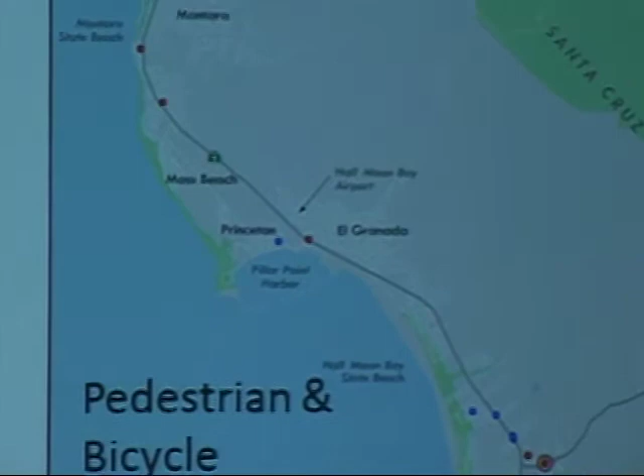Sorry, can you go back to the last one? Can you help us understand the coding there? Blue is bike and red is... the red are where there are pedestrian-involved collisions, and the blue bicycle-involved collisions, and a circle is a fatality. I believe there was just one, on Highway 92 in Half Moon Bay. But what are the metrics of that? Is that just in one year, or the past two years? Those were each one over the 5-year period. One each, at those locations over 5 years. Right.

In the area of bicycling, there are major gaps in the network. Again, Highway 1 is a major connector, but it lacks designated bicycle facilities. We've also found that there is a lack of bicycle parking at major destinations, including the recreational facilities.

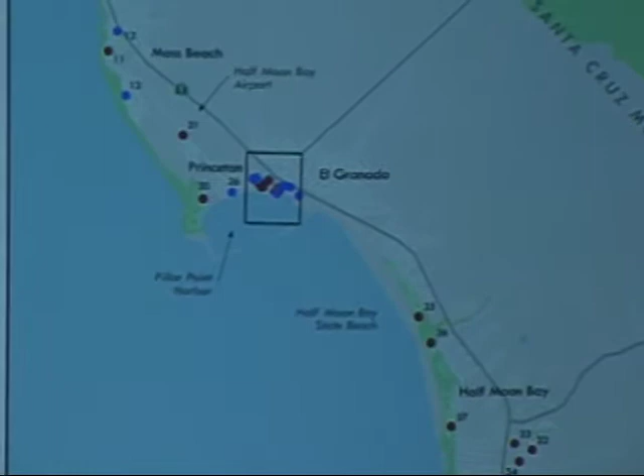For parking, we've done an inventory of parking facilities, again with the emphasis on the coastline and the recreational facilities. This wasn't designed to be a comprehensive parking assessment, but we found there's parking at most of the beaches. In some cases fees are charged, but there's generally not enough parking to satisfy all the demand, particularly on weekends and peak recreational times. We also found there's a need for more wayfinding signage to indicate where available parking is.

Our report describes in more detail the baseline existing conditions of transportation, but that's really just a starting point. The real work here is to do the build-out analysis of land use, project the travel that would produce over the next 25 years, and then load that onto the network to see what difference that makes and what problems it causes.

Peter Winch and the Dyett and Bhatia team have been doing this build-out analysis. They've also been working with Princeton and Half Moon Bay, so they're very familiar with the land use issues here. I'll turn it over to Peter to talk about the build-out analysis.

Thanks, Bill. So when we refer to build-out, we're talking about what could reasonably but conservatively be built under existing zoning in this project area. I'll walk through the methodology briefly that we used to estimate build-out, and then we'll get into the results a bit before going back to look at the traffic implications of that potential development.

The build-out analysis is a multi-step process. The first step is identifying the potential sites where development may reasonably happen. We looked at vacant land, underutilized land—typically commercial sites with low built value compared to land value—and residential land on very large parcels with conventional residential zoning. We separated out parcels that have existing proposed development projects and calculated those based on what's actually being proposed. The assumptions are slightly different between the sub-areas, which I'll get into in a second.

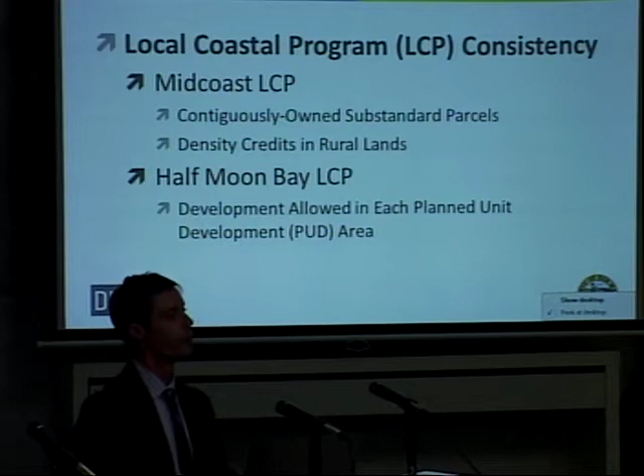The study area, as James first said, starts up at Devil's Slide and goes all the way to the south end of Half Moon Bay and over to 280. So it's a large area we're talking about. In terms of transportation arteries, we're really focused on Highway 1 and 92, but there's a larger catchment area of potential development that feeds these roads.

These were analyzed for the purpose of build-out in sub-areas, partly because of the local coastal plans, and partly because of different planning efforts underway in these study areas. Half Moon Bay's general plan update is currently in process, and we're also involved in that, so that is its own sub-area.

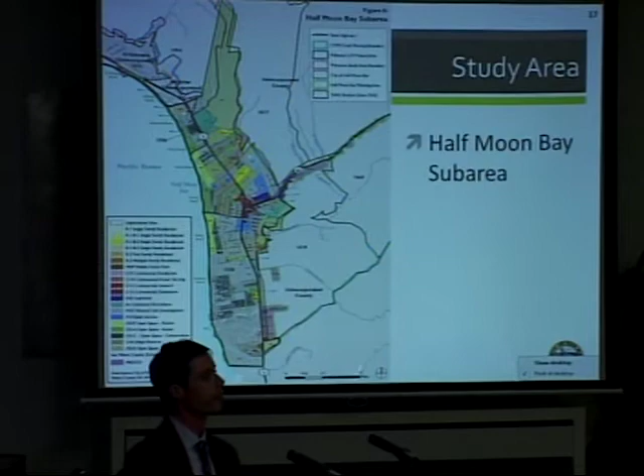These maps show zoning, and if you look closely at the report, you can see the vacant and underutilized sites are outlined as well.

The Princeton sub-area, which is also undergoing a current planning process, has been carved out of what we're calling the Midcoast sub-area, which is the rest of the Midcoast LCP area -- Montara, Moss Beach, El Granada, and Miramar. And finally, the rural lands, which are the largest area but have the least potential for development because they are rural and have rural zoning.

Summarizing the results of crunching all the numbers from those assumptions and that analysis, we would conservatively see, with the current zoning, if all of these sites were developed at a reasonable density or intensity, an overall increase of about 51%, or about 4,300 residential units.

The greatest amount of capacity is in the Midcoast sub-area, again which is El Granada, Moss Beach, Miramar, and Montara. We'd see a 66% increase in the Midcoast, about 2,600 units. Half Moon Bay would see a smaller number and a smaller percentage increase.

Residential development in Princeton would also grow by about 45%, because we're assuming that 1 in 4 parcels in the waterfront zone would have caretaker units, and we're counting those as residential.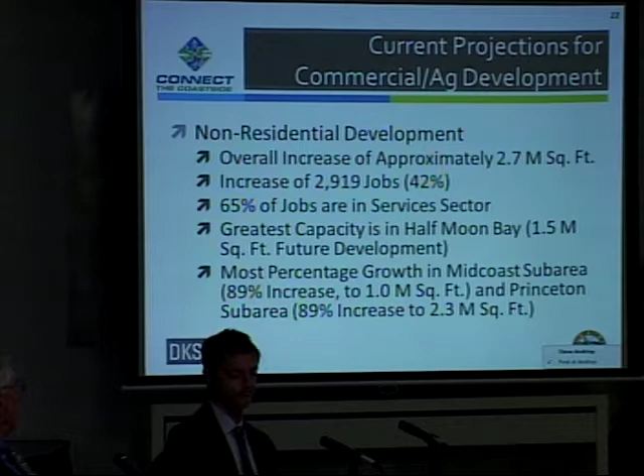There's another dimension to growth in the Midcoast area, as you're all very familiar with, which is the capacity of infrastructure systems. We specifically don't use that as our threshold for analysis in this project because of the way the LCP policy is. We need to understand what the actual build-out would be, aside from this constraint, which we know is a real constraint -- what is the overall conservative build-out estimate?

But we do want to reflect that there are currently constraints with regard to water capacity on the Midcoast. Briefly, the Coastal Act requires that water be reserved for priority land uses, and the priorities of the Coastal Act are coastal recreation and coastal dependent uses.

The Midcoast LCP reserves 61,000 to 77,000 gallons per day in the Montara Water and Sewer District, and a much larger 490,000 to 532,000 gallons per day for the CCWD, which has a much larger service area and population in the Midcoast area. CCWD is also the water service provider for Half Moon Bay, and the Half Moon Bay LCP reserves 1 million gallons per day at build-out.

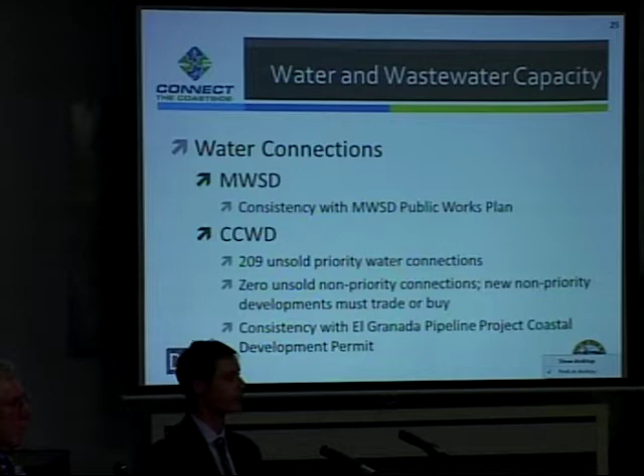When new development installs new water connections, it needs to show consistency with the governing Public Works Plan. In the Montara district, and for CCWD, there's actually a very small number of unsold water connections and zero unsold non-priority connections, while there is more demand for non-priority use connections like regular residential and commercial development. So these are real constraints we're dealing with.

I'll go back to Bill to bring these build-out numbers into the traffic perspective. This project isn't designed to find out how much development you want, but to figure out how much development could be supported by the transportation system as it exists now, or with improvements that could be made with available funding, evaluated using standards established for quality of transportation. So that's what we set out to do.

We used the San Mateo County, or CCAG/VTA, travel model. It's a model that includes the whole region with a lot more detail in San Mateo and Santa Clara County. We forecast using build-out land use within the Midcoast and Half Moon Bay area, combined with forecasts produced by regional agencies for the rest of the Bay Area, for 2040. So it is a regional model, reflecting regional flows and the relationship of Midcoast to other parts of the county and region.

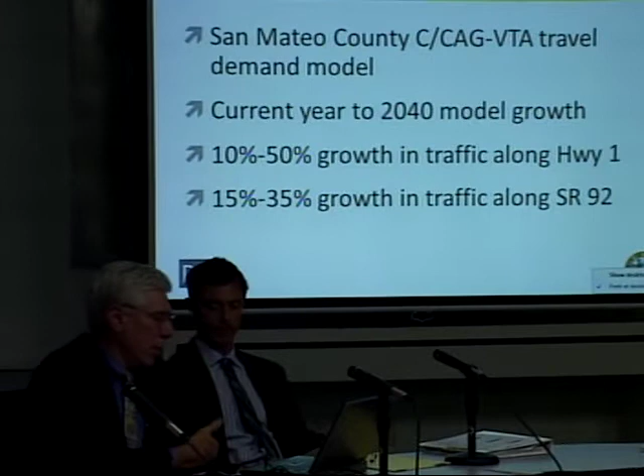As Peter mentioned, build-out would be a 51% increase in residential development, 42% in non-residential. When we looked at peak hour flows on the roadways, it was generally a little less than that, but not a whole lot. It ranged on Highway 1 from 10% to 50% growth in peak period travel, but most was between 35 and 40%. On Highway 92, it ranged from 15 to 35%, with the increase closer to 35% the closer you get to Half Moon Bay. So that gives a general sense of how overall traffic during the peak period is likely to increase from build-out.

So with that, we looked at locations for which there would be some governing standard, and there are standards only for traffic level of service. Some relate to segments between intersections, some relate specifically to intersections, and there are differences between signalized and unsignalized intersections. Some standards come from the county, and Half Moon Bay has its own standards, but what we found were the controlling standards for evaluating these are the ones in the Local Coastal Program.

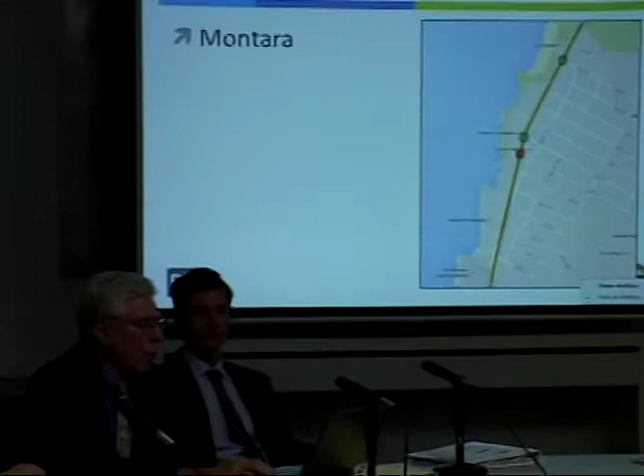So this is Montara. This map shows now — the data we collected this summer. Each one of these will be a pair; I'll show now and I'll show 2040. In Montara, there was one intersection. If there's not a heavy circle around it, it's a two-way stop control or stop control — there's not a traffic control device or signal there, which becomes a problem as volume increases.

It gets harder to have gaps that people can use to turn left, and left turns are the real problems with stop-controlled intersections. There's already one at Ocean View in the existing case, and a second one at Second Street.

Violated in 2040 with the future forecast. I'm going to go through these quickly because the bottom line is it gets worse in all of the sub-areas. 22 stop-controlled intersections move into violation with the 2040 forecast. And again, that's primarily because of the volume on Highway 1, not because of the volume being added on the cross streets. The problem is not having gaps.

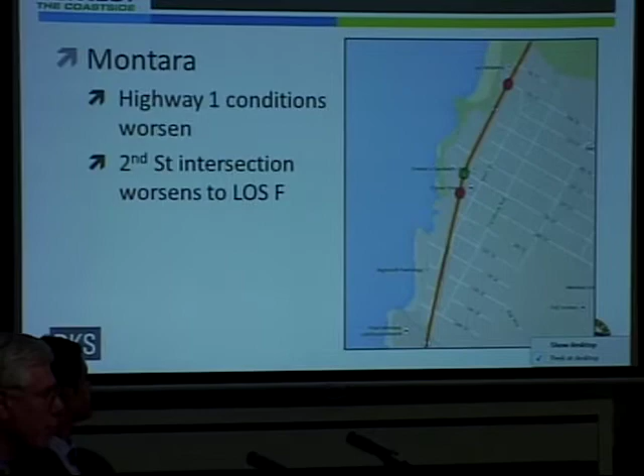So to deal with that, you either have to signalize, you have to prohibit left turns, or you put something, a roundabout or some mechanism for being able to allow more continuous flow and not have cars wait for a gap. That's the kind of solution, but the bottom line is there are a lot of them that go from being within the standard out.

So Moss Beach, I think there were 4 stop-controlled intersections, actually 5, there's one right at the bottom, and a 6th one gets added in the future. And there are problems on Highway 1. There's another level of service for just the flow on the highway, and that's related to its width and the volume of it, and almost all of these have problems in the future year.

So El Granada, there are 2 signalized intersections and 4 stop control, and no problems now. In the future, there's one at Coral Reef that exceeds the standard.

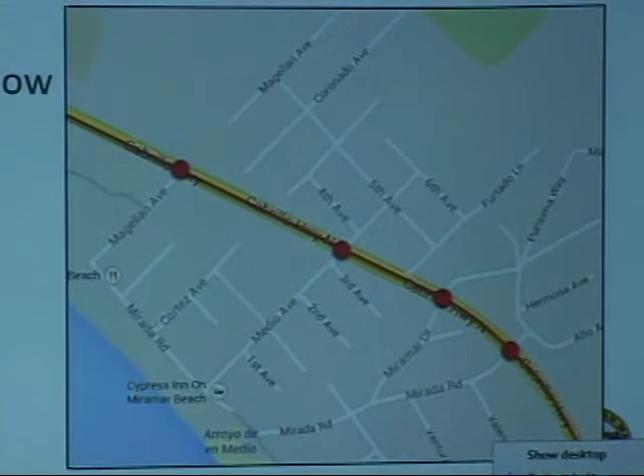In Miramar, there are 4 that are stop control, and they're all exceeding the standard now, and that gets worse, and the segments get worse. What does stop control mean, just a stop sign?

Just a stop sign. So there's no stopping on one, only on the side street.

So again, the signalized intersections are the ones that have the dark circle around them, correct? And so for many of them, if it is signalized, like here, so it takes care of that problem with a signal.

But there are 5 in this North Half Moon Bay that are stop control that are problems now. And actually, the volume on that signalized intersection, I think there are 4 that move. Signalized intersections that move into an exceedance situation, and that's one of them that does that.

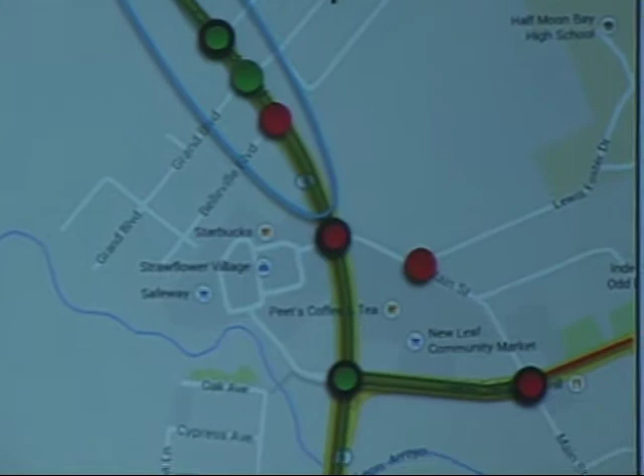In downtown Half Moon Bay, there are 2 signals that are already problems, Main Street and 92, and Main Street on the north side of 1, as well as 3 stop control. There's some improvements planned that will produce some improvements in that area, shown in blue.

But there are other places, like at Kelly, where it would exceed the capacity of the signalized intersection in the future year. And some other stop controls.

South of downtown, there's really 2 stop control that exceed the standard now, and I think that stays the same. But again, with Kelly, shown in a previous one, it's a signalized intersection that would exceed the standard.

And south of Half Moon Bay, the level of service on the roadway itself would violate the standard, but not at the intersections.

And then on 92, there are 2 stop-controlled intersections that exceed the standard now, and the condition worsens there and over all of the segments, as well as the signal up near 280.

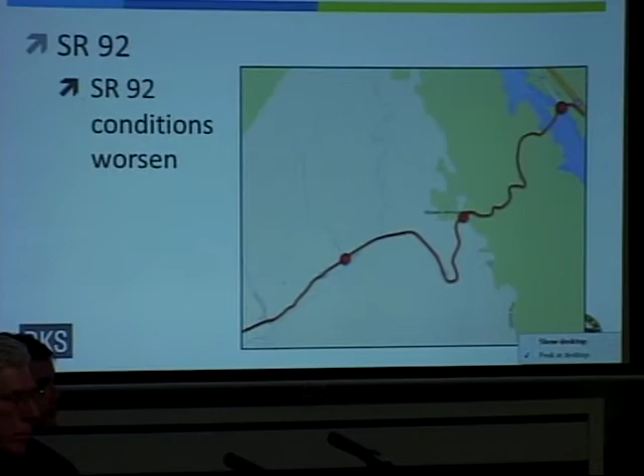So the 2040 element here is with the full build-out which you projected. So clearly, full build-out causes a serious issue. And so that's the starting point now, that we say, okay, yes, there's a problem. You can't just build all this and have no problems with no transportation investment. So our next step now is to say, well, what can be done? What kind of transportation investment could address these issues?

Now, there aren't standards for how long a pedestrian has to wait to cross a road, or conditions for that. But we will be looking at that anyway. That will be part of what's taken into account, because part of the charge is to maintain access to the coastal area. So crossing of Highway 1 is important, making the connections to provide that access. We're building that in, but again, the judgment against the standards tends to fall back on these traffic issues for which a formal standard has been stated.

So I did want to come back to one thing on that. Dan said Ox Mountain. Ox Mountain's a private road. Are you considering private roads as access control points that need to be addressed? I'd have to look at the report to see if that was considered.

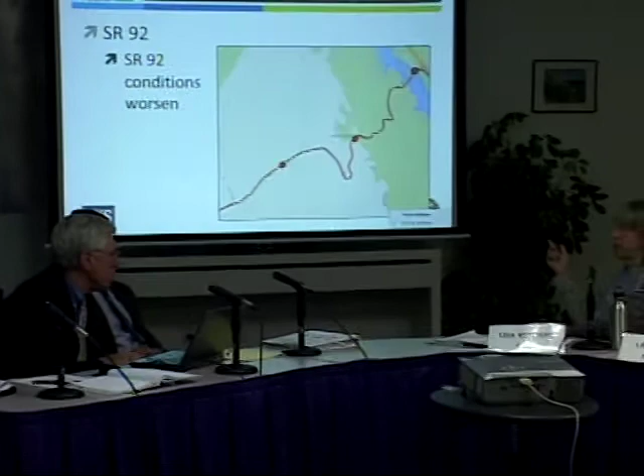I'd have to look to see what those were. You had a location off of 92 called Muddy Road, maybe that's the Ox Mountain. There were some names there that weren't familiar to me, but I assumed it was those intersections. Yeah, and we can check those.

With this analysis, we know we have to evaluate alternatives, so it starts to set that up. We will be looking at options that could improve pedestrian and bicycle movements, including improved pedestrian crosswalks, illuminated crosswalks, countdown indicators, increasing the width of sidewalks, connecting existing sidewalks and removing obstacles.

That came up over and over again, the gaps and the need to do that. And then certainly making sure the coastal trail gaps are identified and projects identified to extend and connect the trail, looking at ADA compliance and lighting.

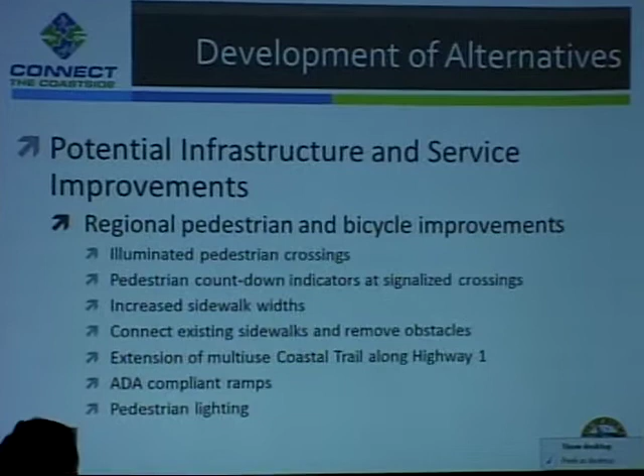Does that mean the coastal trail, or what we refer to as the parallel trail? In that sentence, you mean the parallel trail. The coastal trail is west of the highway, whereas the parallel trail follows the highway. Yes, I think that's what was meant. To people here, that would be the parallel trail.

And then we threw in some of the diagrams from the work that was done in the Highway 1 Safety and Mobility Study, and everything that was in there will be included in the consideration, and the input received through that significant public input effort will be included. So things like the Gray Whale Cove parking lot with striped highway crossings and left turn bays, acceleration lanes. Those kinds of concepts will be looked at. The Montara Beach and trail access, again, highway crossings and beach parking.

In Montara, raised medians to limit turns across the road, restrict and consolidate left turns. The left turns are the big issue that have to be dealt with from the side roads.

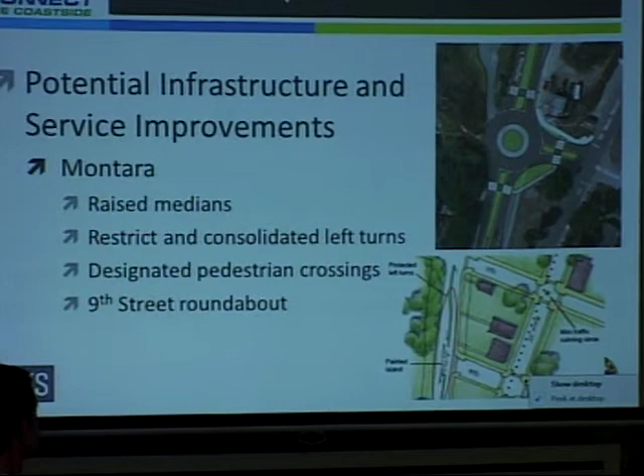Designated pedestrian crossings, and we'll be looking at roundabouts. That was examined in the Highway 1 Safety and Mobility Study, and we will include consideration of roundabouts where they would appear to be a logical option.

Since roundabouts weren't considered in Half Moon Bay, will they not be considered here? In your Half Moon Bay transportation plans, there's no reference to things like roundabouts, so you won't be looking at roundabouts in Midcoast? No, I think we would, and there were none formally proposed in Half Moon Bay, but left as options for...

Intersections that would require changes in traffic control with increase in volume. They were open to that, but the way that the circulation element was developed at the time, they only moved forward specific projects that had gone through the Local Coastal Program or Coastal Commission approval, and there were no roundabouts that had gotten to that point.

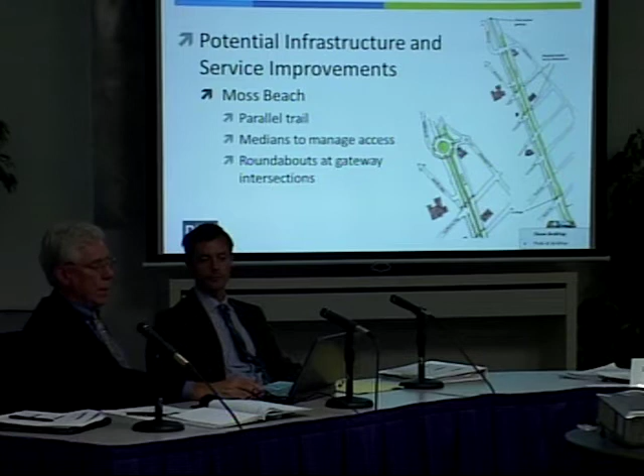Did you find any interest in the public there when you did the studies? Yes, there was some. And they're definitely growing in acceptance in the state, and you're seeing more and more of them, and in the right kind of situation they can be a very efficient way of handling that traffic from side roads.

And the improvements that had been identified in the circulation element will be taken into consideration. A lot of those were in the Grand Boulevard, Terrace Avenue area, but other concepts were identified for further explanation, which will be taken into account.

So we're just now starting out. We've been developing an inventory of the improvement ideas that have come out of other studies, to make sure that everything identified in the past as an option is being considered. We will begin seeking public input in a workshop on the 10th of November. It will be at the Half Moon Bay Brewing Company, 6:30 to 8:30.

We've actually already been getting input from the public. We've been maintaining a website, the Connect the Coastside website, and there's an option in there to give your ideas for improvements, and we received a very large number of ideas, so that will be taken into account.

We're going to the Planning Commission on Wednesday, December 17th, with the report that has been drafted and distributed for review by the TAC. Based on comments we got from the TAC, we're making some revisions to that report before submitting it to the commission. We'll be asking them to accept that, and then that will really initiate the development of alternatives.